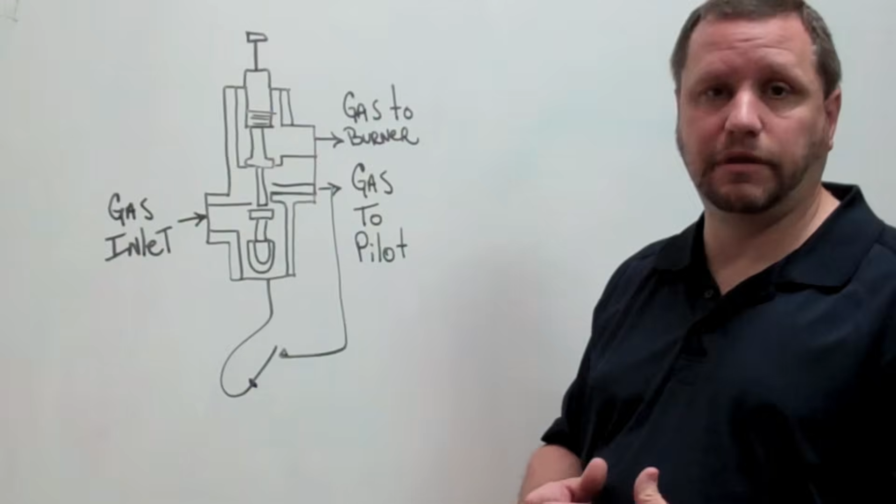To better understand how to light the pilot, it's important to understand how a pilot light actually works. What I've done is I've drawn kind of a simple valve right here, and this is going to look a little different on some of your valves, and that's okay, but the concept is going to remain the same. We're going to push in a plunger. Now the plunger, what we're going to show you in a second, is going to be the knob that says pilot on and off typically.

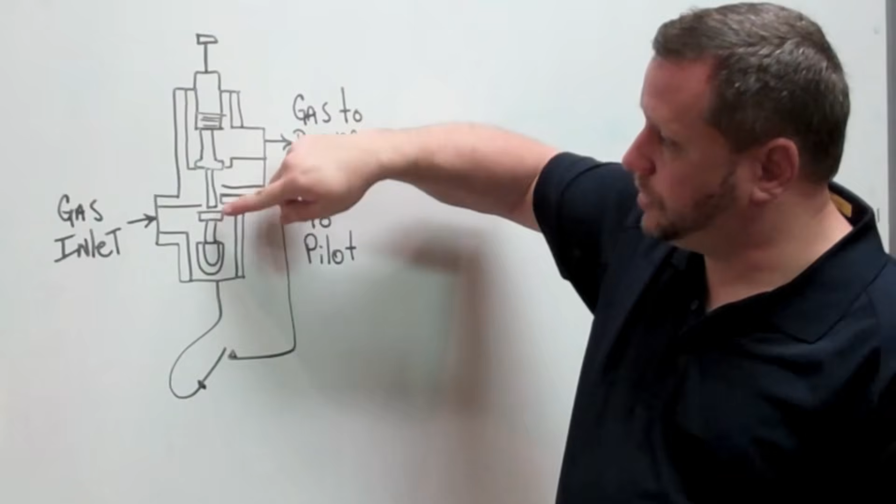And what we're doing is we're going to push this plunger down, which pushes our gas disc down. That's going to allow a little bit of gas to flow through the valve and out through the pilot valve, or the pilot orifice. The small amount of gas will come down here. You'll strike an igniter or light it with a little match.

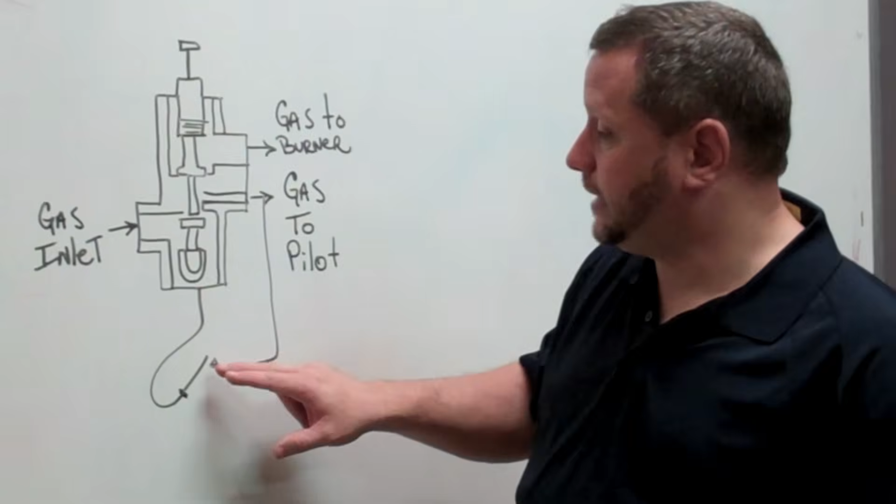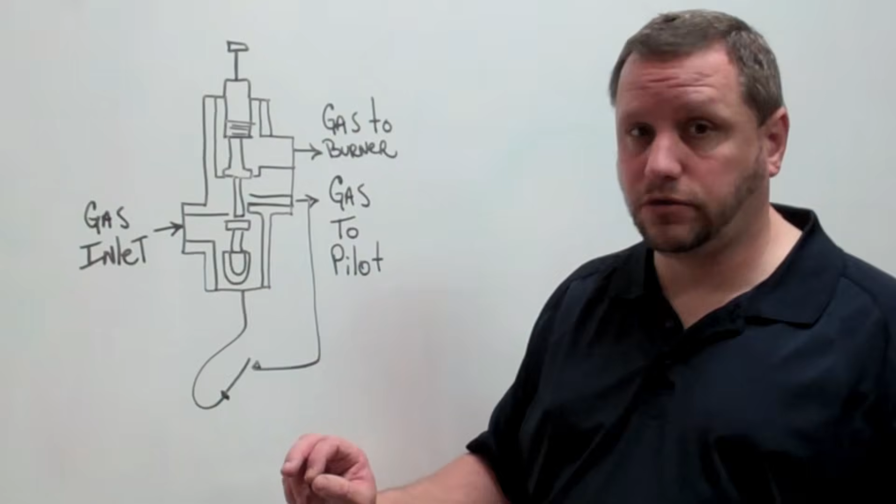And what it'll do is as that pilot light heats this thermal device, okay? Could be a thermocouple, could be a thermopile. We'll talk about that in a minute. It's not important right now. But what this does is this sends a small electrical charge back up to here, which magnetizes this plunger. Then once this holds, you can release the push button.

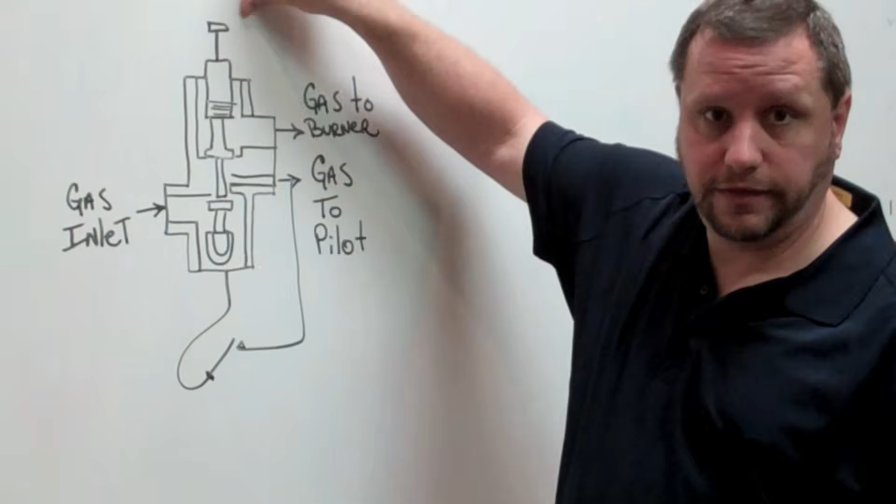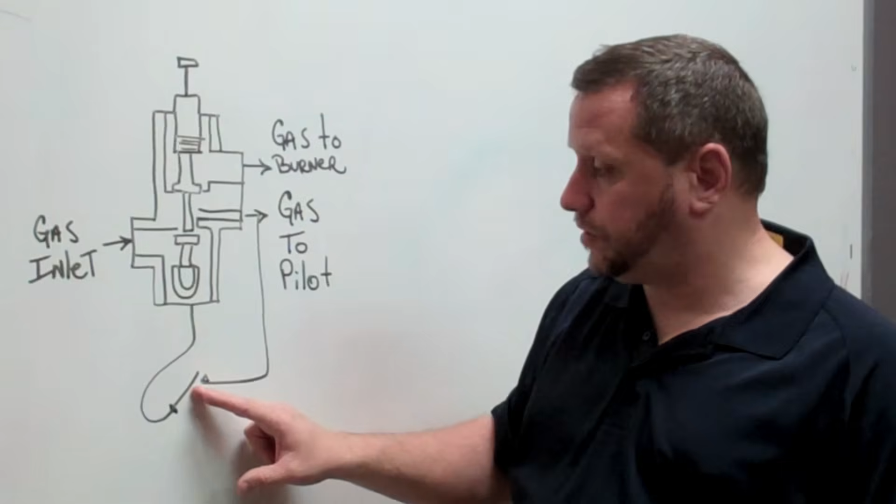Okay, this process is known as the thermocouple bypass. What you're doing is you're pushing it in and holding it in long enough to allow a little bit of gas to light the pilot. Once the pilot holds, it heats the thermal device. The thermal device holds the valve open, and then you can release your thumb.

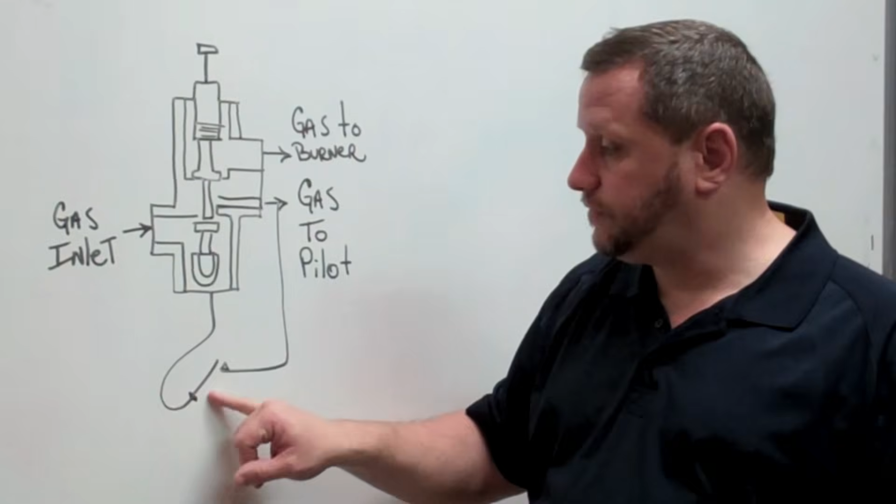So when you start to do this a couple of times and you can't figure out why is the gas not working, why I can't get the pilot light to hold, a lot of times it's just taking a few minutes to get this hot enough to generate this charge. If you're not getting gas through at all, that's a different problem altogether, and we'll talk about that as well.

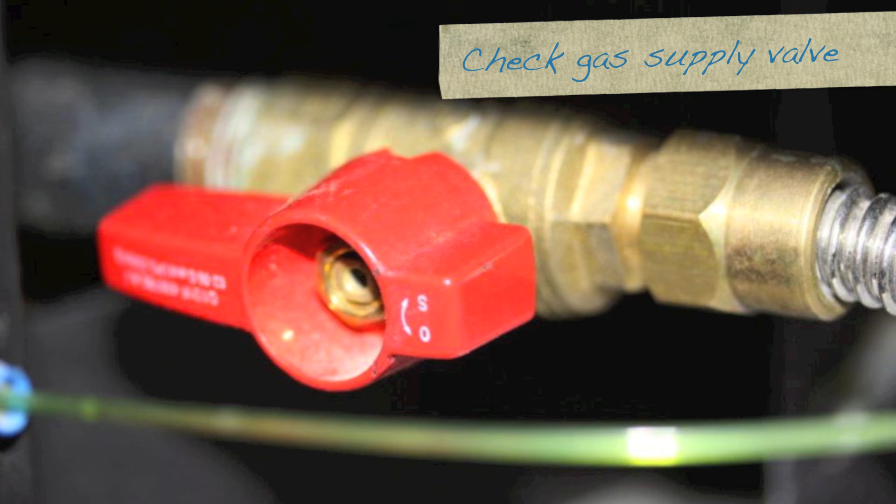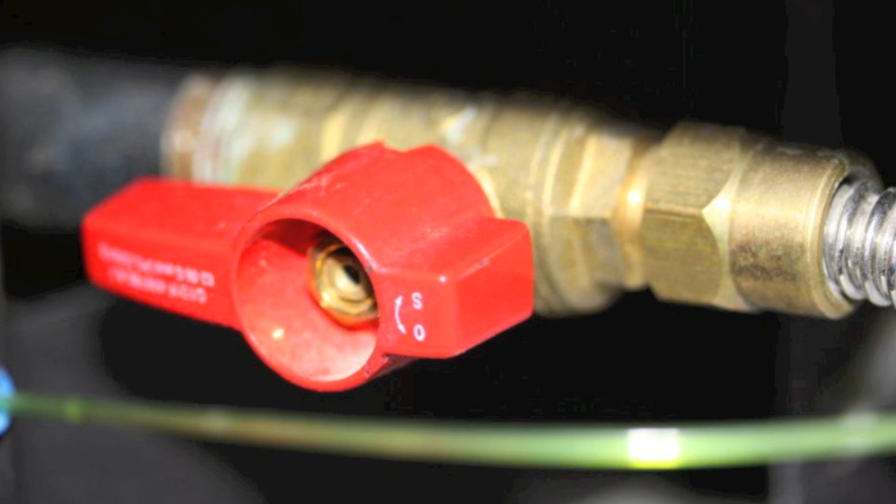Before you attempt to light the pilot, let's make sure that the gas supply to the fireplace is turned on. Look for a valve similar to the one shown here. If the knob is turned to the left or to the right or perpendicular to the gas line, then the gas is shut off and lighting a pilot is going to prove to be pretty frustrating. Turn the valve knob so that it's in line with the pipe itself, and that way we know that gas is supplied to the fireplace before we try lighting the pilot light.

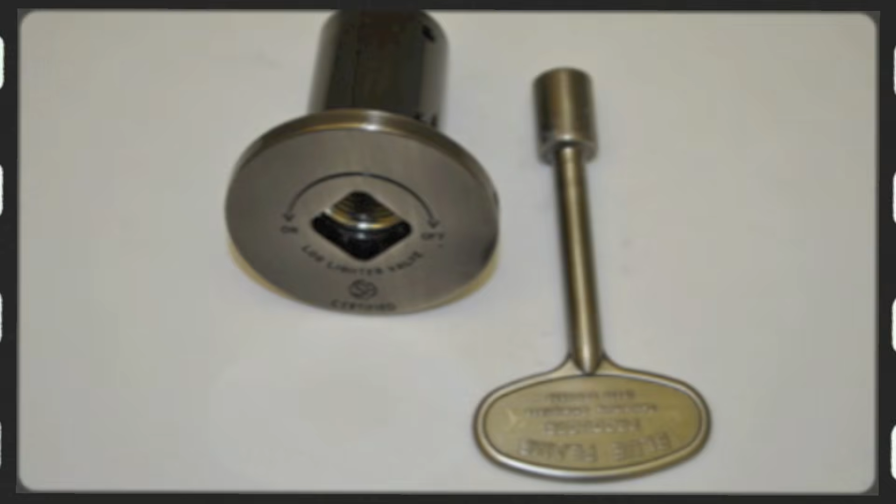You may also have a key valve like the one shown here. The face of the key valve is called the escutcheon, and on the escutcheon will be a set of directions turning to the left or to the right. Follow those instructions to make sure that the gas is supplied to the fireplace.

The first type of pilot assembly we're going to talk about today is called an SPK, or a safety pilot kit. This type of control valve is generally found on vented gas logs without remote controls. Manual safety pilot kits are probably the most common on vented gas logs, and they can be a little confusing depending if they're on the left or on the right.

If you look right here on the control valve, you can see what appears to say on, pilot, and off. Now these are just stickers, and if they were on the right hand side of the control valve, which they are sometimes, then they would read properly, off being at the top, on being whatever. But the pilot always needs to turn away from the gas log, regardless of whether they're right or left. If it's facing away from the gas log, then the system is off.

Here you can see on, pilot, and off. And you can also see up here the actual pilot assembly typically sits on the same side of the gas log as the control valve between the front and back logs. What we're going to do is we're going to turn the pilot. We're going to kind of turn it here in the middle, and you may need to push it in a little bit to get it started.

If your control valve is on the left, the pilot will be at the bottom. If your control valve is on the right, the pilot word will be pointing upright. Now we're going to perform the thermocouple bypass we discussed by pressing in the control valve. And you can hear a little bit of gas coming through. I'm going to light my pilot.

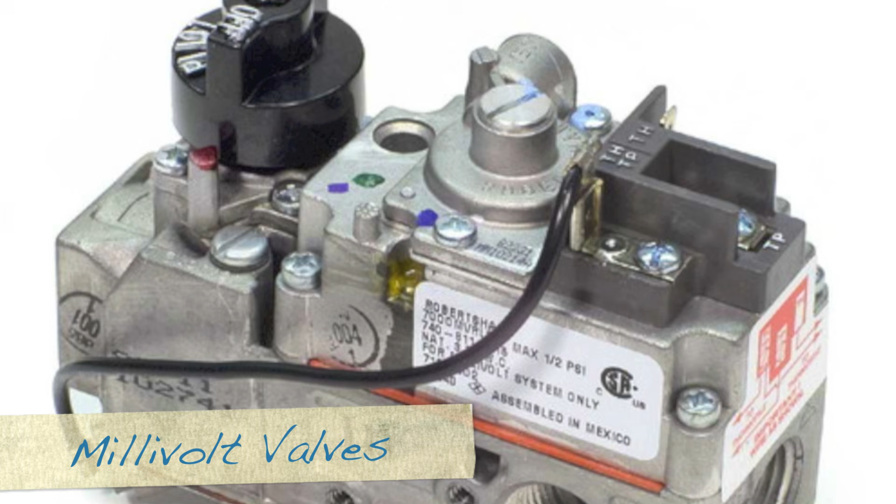The second type of control valve we're going to talk about today is called the APK, or the Automatic Pilot Kit. These types of systems are found on vent-free units or vented units with on and off or thermostat remote controls. They are not variable height remote control. The common type of control valve you're going to find on a non-vented set is going to be just a standard millivolt control valve. Millivolt control valves have two distinctive dials. One will simply say on, off, and pilot, and the other will have a variable high to low control valve.

Now, this particular type of valve is not going to do variable height with the remote control. It's only going to be a manual adjustment, but there will be an easy hookup for remote control for both thermostat remote and on and off remotes simply by 2 wires. On this particular type of control valve, what you'll see is a notch to the right, and that notch, or it could be a little dash, will point to a particular position on the control valve. Here you can see off.

We'll switch this to pilot, press it in. You can see that there's actually 2 different positions here. Pushing it in slightly kind of relieves tension, and then pushing it in further, you can actually feel the tension there, and that's going to allow the gas to flow through the pilot assembly. We'll press our igniter, and you can see the pilot light lighting up. You can see the blue flame is heating up our thermopile right here. We'll give that a few seconds here. We'll begin to release it slowly, and if it holds, we're good.